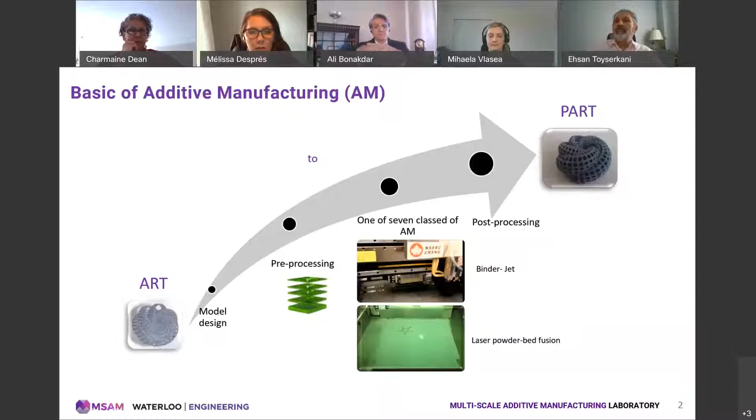As seen in this chart, the process enables the fabrication of complex parts so rapidly, thus enabling moving from art to physical part directly. For clarification, additive manufacturing is not one process. According to ASTM standards, AM includes 7 processes.

The most common one is material extrusion, known as FDM, very popular for printing plastic parts. The 3D printers used at homes and offices are mainly of this type. However, among more comprehensive and challenging processes, there are 3 used mainly for metal additive manufacturing: binder jetting, powder bed fusion, and directed energy deposition. Here at the University of Waterloo, we are mainly deploying these technologies for innovative R&D with industry.

As the modern history of AM is almost 35 years old, the versatile technologies and broad materials motivated people to adopt this technology for different applications. Back in 1995, the technology was mainly used for rapid prototyping, for design verification and visualization. It has also been used for rapid tooling and casting, in which prototype parts were used to develop molds and cast. In the first decade of the new century, AM technologies started to be used in the aerospace and automotive industry to make customized polymeric parts as jigs and fixtures.

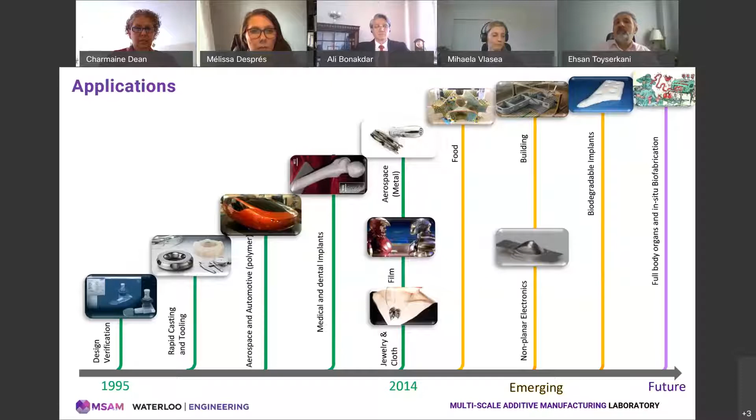In the second decade of the new century, the technology was commercialized for dental and orthopedic applications, a very growing market for additive manufacturing. It has been commercialized for the jewelry and clothing industry, the film industry, as well as aerospace for metallic parts. There are emerging applications in other industries like food, non-planar electronics, building, and biodegradable implants. In future, we will hear more about full organ printing and in situ biofabrication.

Public interest has dramatically increased. Look at this Google Trend chart. After 2013, public interest increased more than 40 times. That time was associated with news about printing guns and also the endorsement of President Obama.

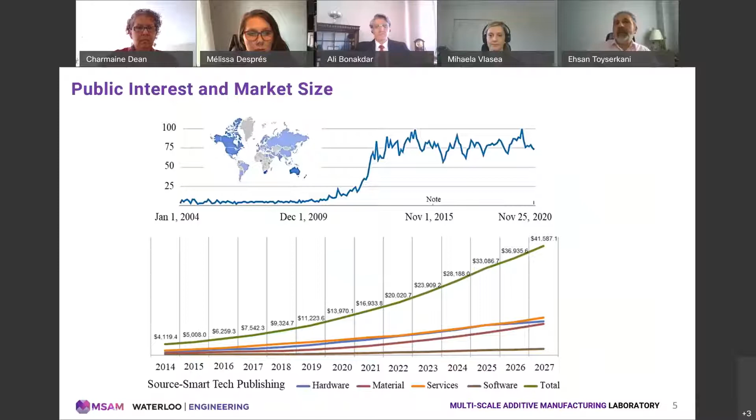Market size is also booming. The market size was $14 billion in 2020. This is the fastest growth among any manufacturing industries, with an annual growth rate of more than 20%.

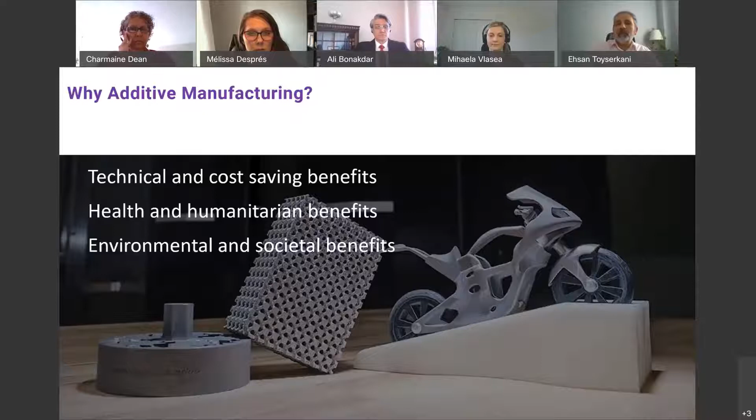But why additive manufacturing? There are many reasons for this high level of interest among industry, public, and academia. The reasons can be classified into three categories: technical and cost-saving benefits, health and humanitarian impact benefits, and environmental and societal benefits.

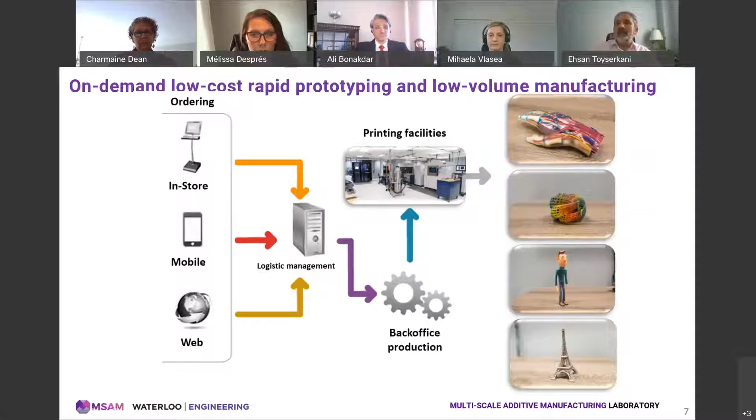One of the major applications of additive manufacturing is prototyping. Such prototyping usually carries at a fraction of the cost compared to conventional processes and at remarkable speeds. This rapid turnaround accelerates the product development cycle, including design, test, revision, and redesign. Products such as molds that could require more than 6 months with conventional methods can be ready for operation in 2 months if made by additive manufacturing. On-demand manufacturing can be realized so effectively and rapidly by additive manufacturing.

AM enables the fabrication of complex shapes that cannot be produced by any other conventional methods. The additive nature of AM offers an opportunity where geometrical complexities will not come at a higher price. Opposite to conventional methods, AM offers a platform called design for use rather than design for manufacture. Parts with organic geometry normally perform better. This feature of AM enables designing beyond imagination and provides tools for more creativity, flexibility, and efficiency.

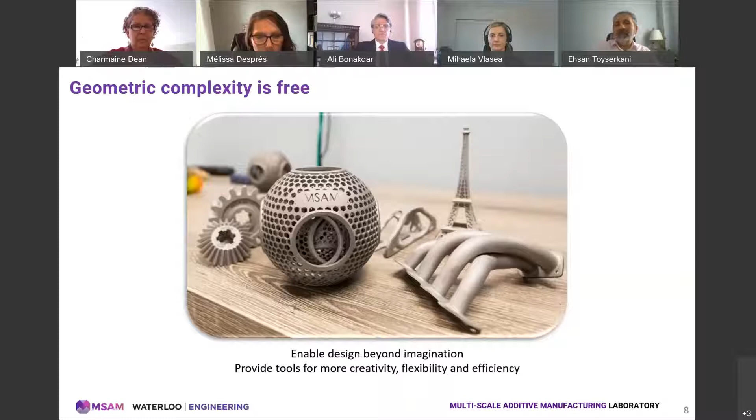Parts consolidation and lightweighting are major benefits of additive manufacturing. There is a major trend among manufacturers to fabricate greener and more economical products; serious obligations toward environmental sustainability have forced industry to develop lightweight components, where AM is a key player. In complex mechanical machines, there are tens, hundreds, or even thousands of components that are welded, bolted, or press-fit to each other. Parts consolidation offers many advantages due to the reduction in the number of individual parts needed to be designed, manufactured, and assembled to form the final system.

There are many advantages I could talk about for hours, but to name one: parts consolidation reduces overall risk of a system, as the number of risks associated with too many suppliers of individual parts drops. Take a look at this photo—it says 1,000 words. This is an A-CT7 engine midframe used in helicopters. 300 individual parts have been consolidated into one printed part, 7 assemblies converted to one, resulting in a 10-pound weight reduction.

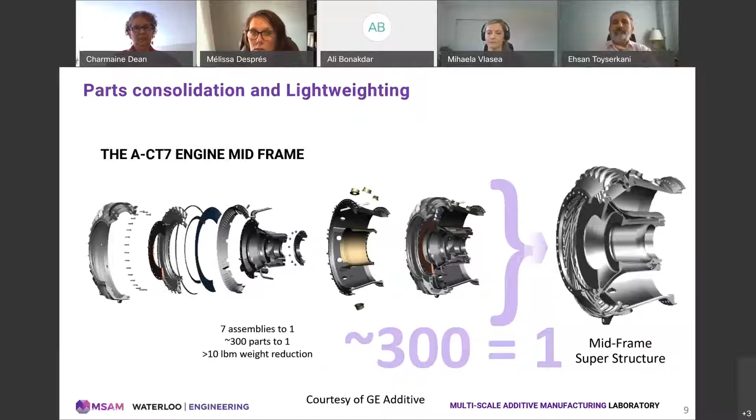For your information, AM parts can bring weight reduction in the range of about 50 to 100 kilograms per jet engine. This results in a significant reduction in fuel costs. Each pound reduction from every aircraft in a fleet of 400 commercial jetliners, like Air Canada, annually reduces fuel consumption by 30,000 liters. Just a few more examples that benefited substantially from lightweighting and part consolidation.

Given that SpaceX is a champion of vertical integration, meaning they bring in raw material at one end and a fully manufactured rocket comes out the other end of the factory, AM is the tool in the hand of SpaceX.

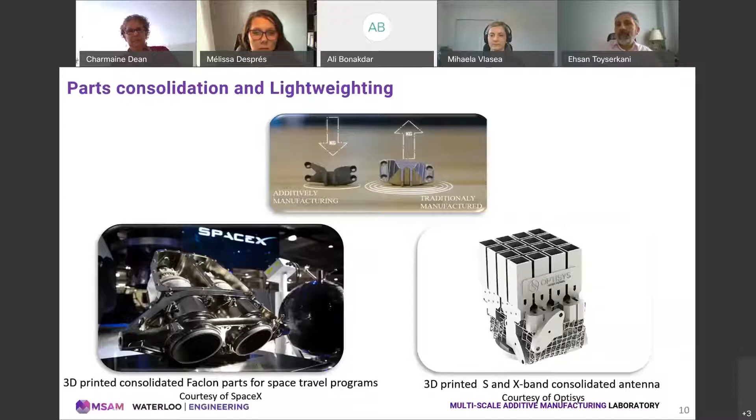The integration of multiple advanced materials and sensors into one component is one of the most rapidly developing areas of additive manufacturing. Cellular and lattice structures with embedded sensors are now becoming a main research thrust in many R&D centers.

Look at these two parts developed at the University of Waterloo. At the left, a smart tool with embedded fiber optic sensors that can measure force nearby the cutting edge. The other one is flexible sensors composed of graphene and silicone for wearable devices used in measuring forces. These innovative products cannot be made with any other techniques.

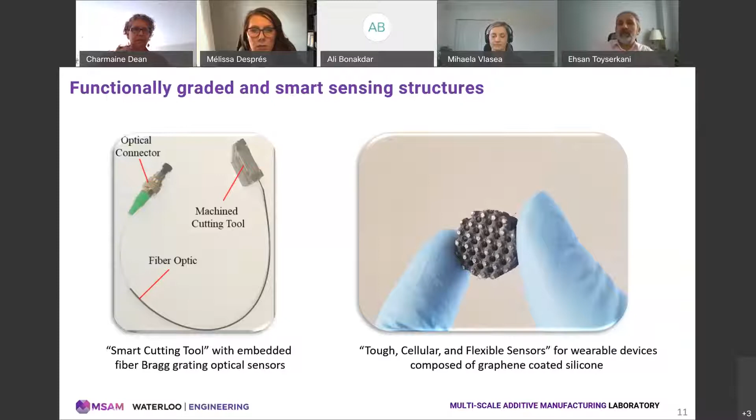Parts repair, refurbishment, and solid freeform fabrication are among other benefits of additive manufacturing. Machining errors or last-minute engineering changes can affect on-time delivery of tooling and impact the kickoff date of new products. AM can be applied as a safe technology to repair tooling, especially on critical contacting surfaces. AM, in many cases, can save high-value components that would otherwise need to be replaced.

As seen, AM has been used in situ repair and freeform fabrication of features on previously fabricated parts by other methods. It can also be used for making legacy parts where the supply chain is not available anymore.

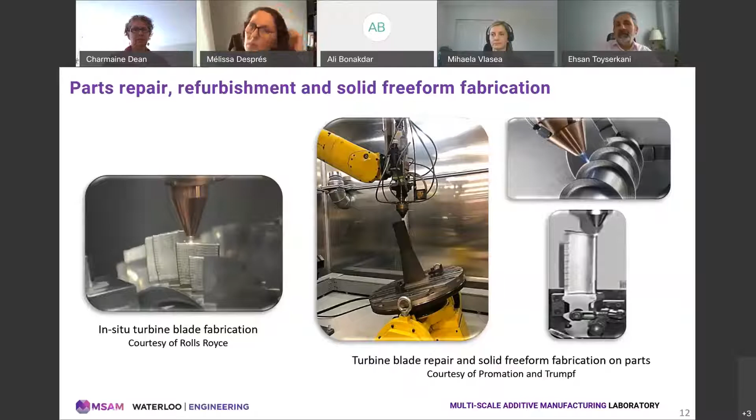AM offers a simpler supply chain. The recent pandemic has changed the mindset of governments, and they are now incentivizing local manufacturing to boost not only local communities, but also be ready for future crises. AM will play an important role in the realization of local manufacturing.

In addition, more innovators and user entrepreneurs are turning into on-demand manufacturers, utilizing the opportunities of access to flexible local production. A shift towards local manufacturing has already begun.

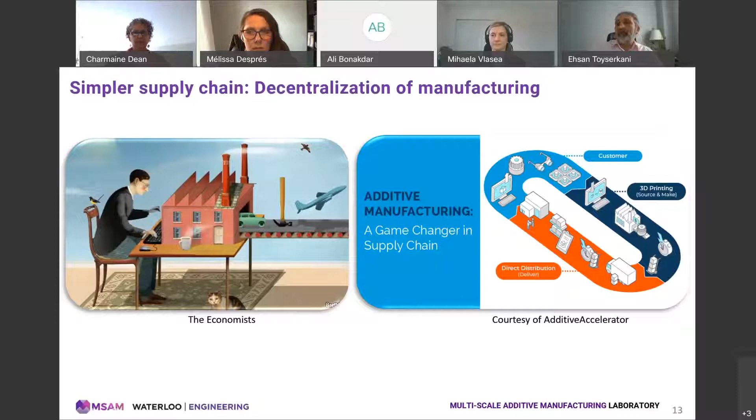Interruption to the global supply chain during crisis can be catastrophic to the health and well-being of society. AM processes can provide remedies during such crises. In March 2020, exactly last year this time, the 3D printing community got together to help in making medical devices during a very hectic period when medical centers were suffering from lack of PPE.

In the Waterloo region, the 3D printing community got together and coordinated by a local company called Inksmith. In a short period of time, more than 200,000 face shields were made and donated to hospitals until the global supply chain started to provide supplies again. I'm very proud that the team at MSAM contributed to this goal significantly.

Given the history and this story, the same distributed fabrication model can be used in any crisis, but it surely needs some proactive planning by the governments.

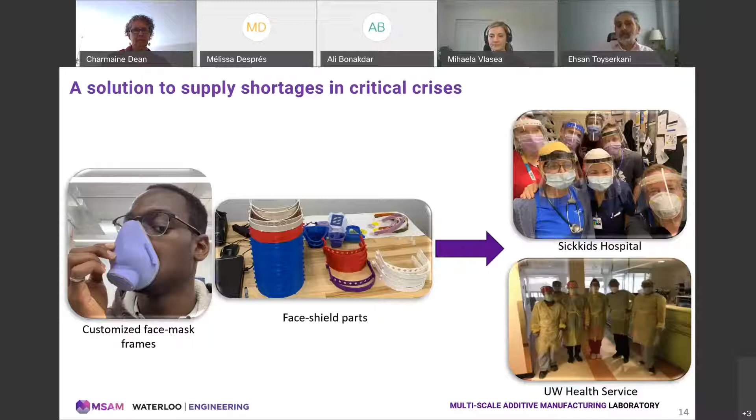The biomedical sector has been benefiting from additive manufacturing for almost 15 years. Customized prosthetic and implants are already being manufactured by AM. As seen in this slide, many innovative customized implants have been developed for different applications.

Alongside the obvious benefits to industry and medicine, AM is explored as a potential aid to humanitarian issues. Intensive R&D is already taking place in 3D printed houses to assist in the provision of homes and shelters in regions of need.

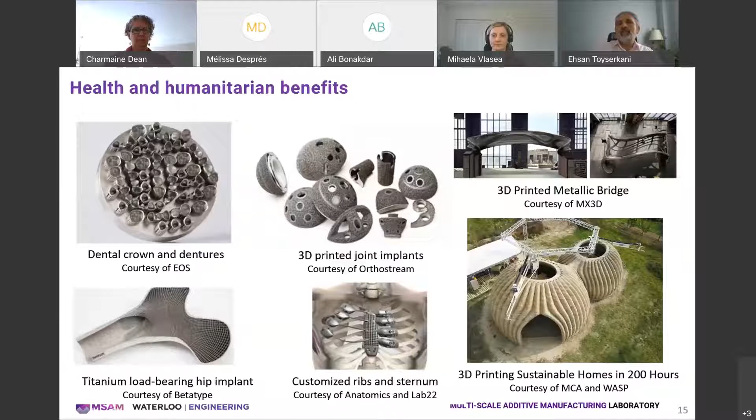In addition to undisputable process flexibility and benefits, AM also offers several major environmental benefits. If the process chain and designs are properly developed, AM technologies are usually greener than conventional methods because there is less material wasted and less steps required to fabricate the parts.

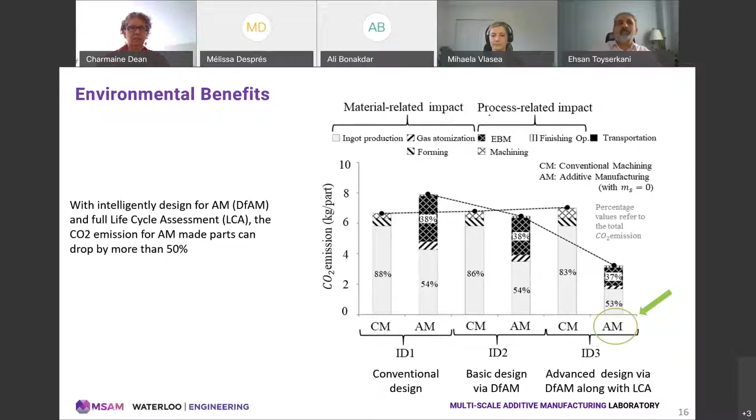However, a full life cycle assessment must be conducted on the AM part to ensure its design is fully optimized for additive manufacturing. The plot shown in this slide is very interesting. It shows that if we use AM for conventional design, the CO2 emissions even increases. But if we do a comprehensive design for AM, followed by life cycle assessment, the CO2 emission drops by more than 50%. This is one of the main motivation factors for industry to adopt AM for their business sustainability.

Like all innovative and emerging technologies, challenges exist for AM. However, these challenges have brought many opportunities for industry, academia, and public.

Shortage of qualified materials for AM has brought many opportunities to develop new alloys with superior performance. Speed and productivity issues have brought to the market many innovative AM systems with multiple lasers and automated powder delivery systems. Repeatability issues and in-situ quality assurance have motivated companies and universities to work massively on innovative integrated AM and artificial intelligence platforms.

Lack of industry-wide standards have mobilized many standard organizations like ASTM and ISO to work together and develop effective standards for additive manufacturing. Issues with end-to-end workflow, integration, and automation have encouraged companies to work on new software and AI algorithms. Interestingly, additive manufacturing has the highest adoption rate of artificial intelligence among industrial manufacturing platforms.

Software limitations have encouraged companies to add AM process constraints to modeling and simulation packages.

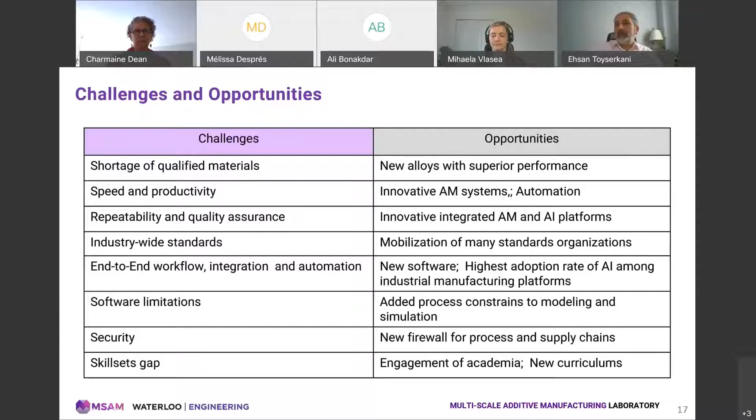Ladies and gentlemen, additive manufacturing is a long-term game changer. Thank you very much for your attention.

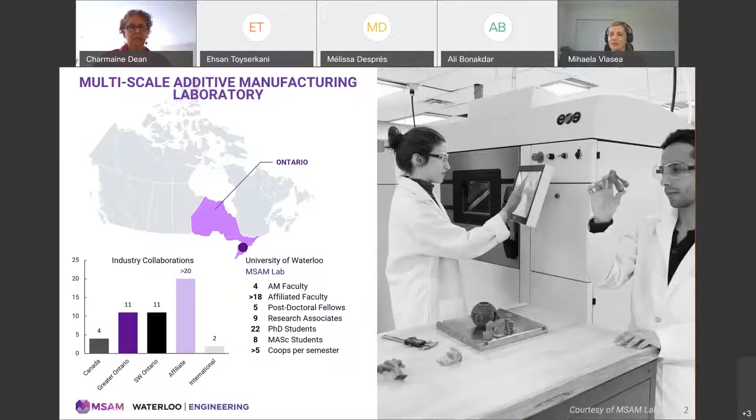We leverage the largest metal additive manufacturing academic research facilities in Canada, and we do so to engage not only in scientific discovery and industrial R&D spanning across multiple sectors, but also to engage in education and training.

In our day-to-day, we work on solving some interesting challenges in the field of additive manufacturing. The first challenge is to tackle the adoption of new materials for AM processes, specifically metals, which can enable new supply chains and market sector opportunities.

The second challenge is to work on the next generation of machines and custom manufacturing systems, either for research discovery or in partnership with industry. The third challenge is to leverage data science, modeling, and simulation towards improving the digital tools in additive manufacturing.

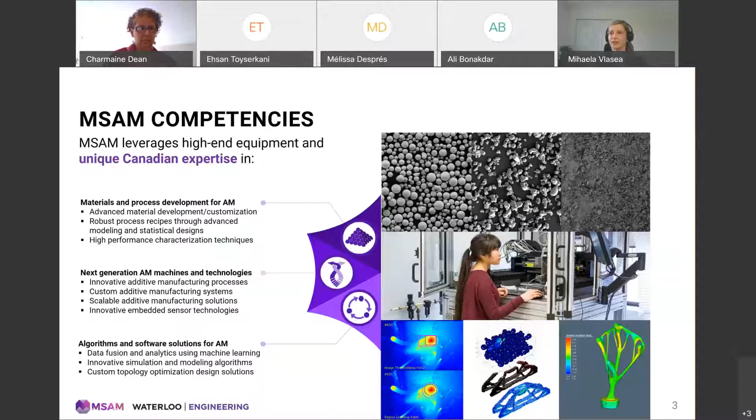To achieve these goals, our work spans the majority of metal additive manufacturing technologies, as shown on the right, with a secondary focus on ceramics and polymers as well.

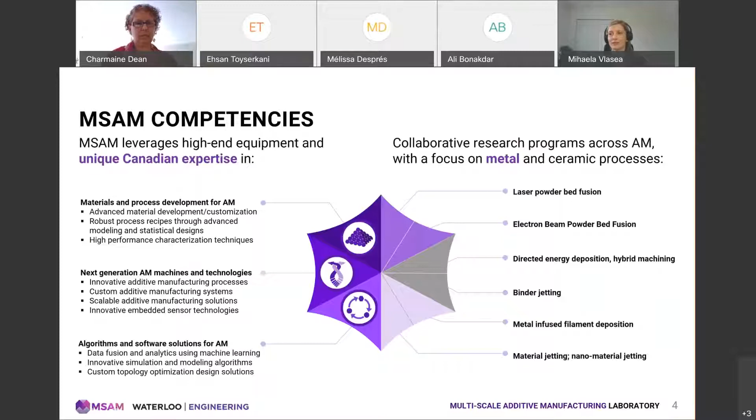Additive manufacturing, unlike subtractive and formative shaping, is the process of fusing units of materials together at select locations, usually layer upon layer, based on digital designs. Components manufactured using these three approaches can be combined into more complex shaped products by a variety of different joining processes.

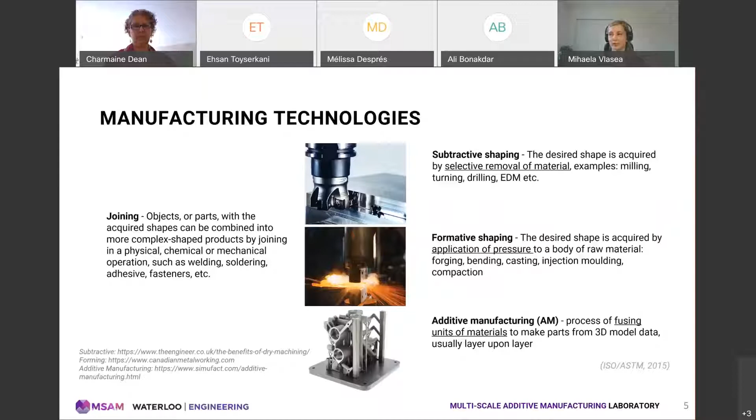This process of fusing units of materials together is what makes additive manufacturing unique. This means that you can generate architected materials at the micro, meso, and macro scale. At the micro scale, one may influence material properties by tuning each unit of material to a unique chemistry or material property. At the mesoscale, one may influence functional properties via cellular architecture designs, such as lattices.

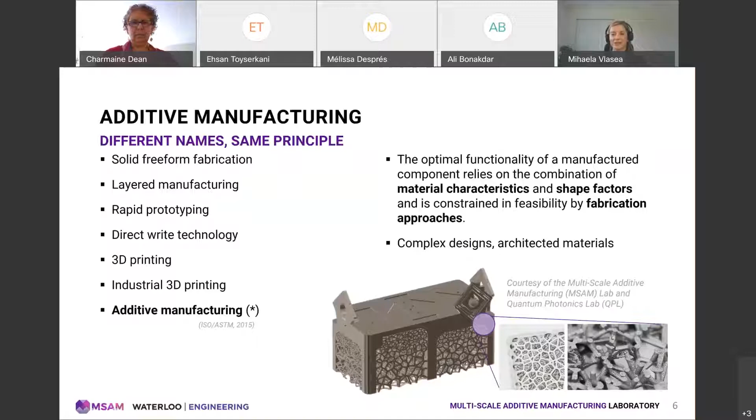And of course at the macro level, as Ehsan mentioned, we have new design freedoms which are not available via other conventional manufacturing technologies. Although known under many different names, I will be using additive manufacturing, or AM, throughout the presentation to describe this class of technologies.

AM processes, as Ehsan mentioned, have been around for quite some time. It was only recently that the consumer and industrial markets have seen accelerated technology adoption in this field. This is because most of the original patents on the 7 classes of additive manufacturing technologies, 7 core classes, have expired in the last decade.

These technologies have evolved since then to accommodate for multiple materials to be adopted under the same technology class. New technology classes have also emerged. Today, I will only focus on laser powder bed fusion.

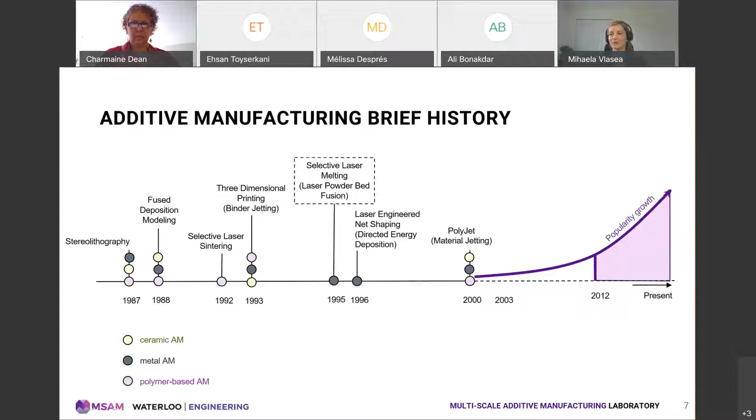In the metals domain in particular, we see a boom in technology uptake and industrialization. This is mainly driven by an increased number of alternate technologies that can address metal production, proven competitive advantage of design freedoms in innovative products, as well as an increased comfort level with AM technology based on proven part life cycles across multiple sectors.

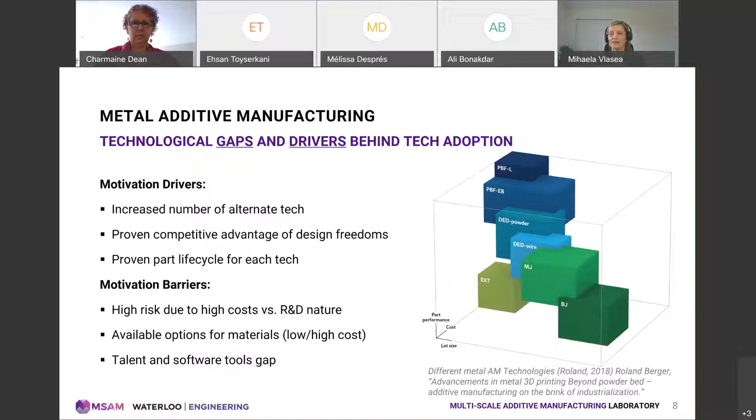Barriers still remain. There is a perceived risk due to high initial capital costs and the R&D nature of these technologies. There is still a need to increase material libraries for these processes as well. In addition, there is a recognized talent gap and software tools gap to effectively deploy AM.

Now let's take a look at how we address these gaps at the MSAM lab.

Although we focus on multiple metal additive manufacturing technologies, I have selected only one process to cover today, called laser powder bed fusion. In this process, thin layers of powder with a layer thickness smaller than a human hair are spread and selectively molten at specific locations within each layer using a very fine laser beam spot. The sequence is continued until the parts are completed. This is a thermal process which requires support structures not only to anchor the part to the build plate, but also to ensure heat transfer, reduce part curling, and reduce porosity defects.

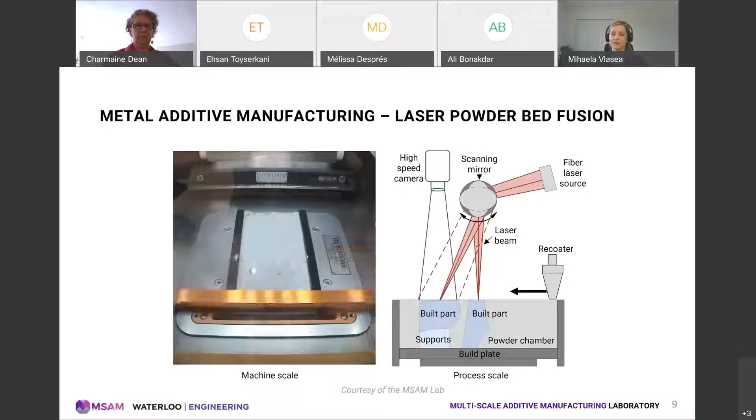For laser powder bed fusion, the laser material interaction is in essence a micro-welding process, where the material undergoes melting, vaporization, and often ejection. With each added layer, the material is exposed to melting, solidification, and thermal cycling, influencing the microstructure and material properties of the final component.

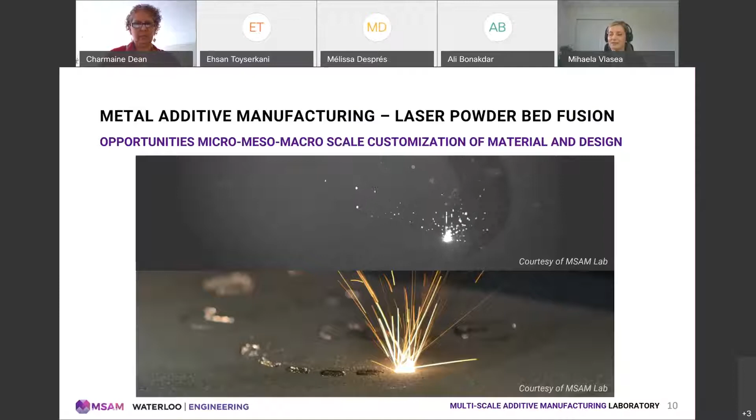The process, believe it or not, has more than 100 parameters that can be tuned in manufacturing. In addition, these parameters are sensitive to the design geometries being printed and can result in part failure if not selected properly. This is why at MSAM we are working on research that de-risks material adoption and increases process robustness.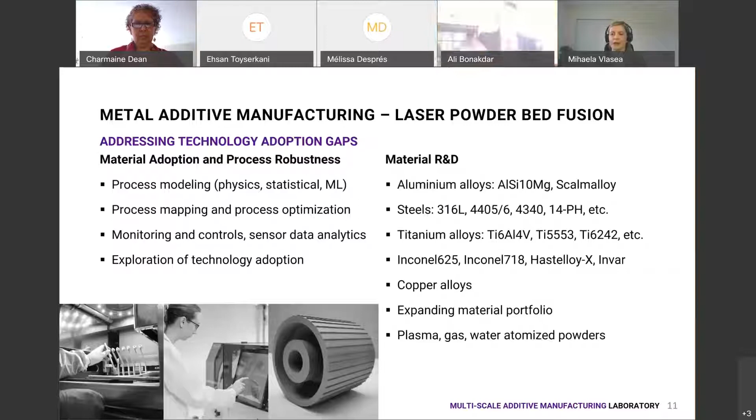These goals are achieved by research efforts in process modeling and simulation to predict the behavior of the laser material interaction and to narrow in onto optimized process parameters that result in successful products, even when printing challenging geometries. In addition, we work on sensor data analytics to monitor the process and to eventually react to perturbations via control schemes. In addition, our lab is exploring new material systems in laser powder bed fusion and other technologies in collaboration with industry partners to address technology adoption in numerous sectors.

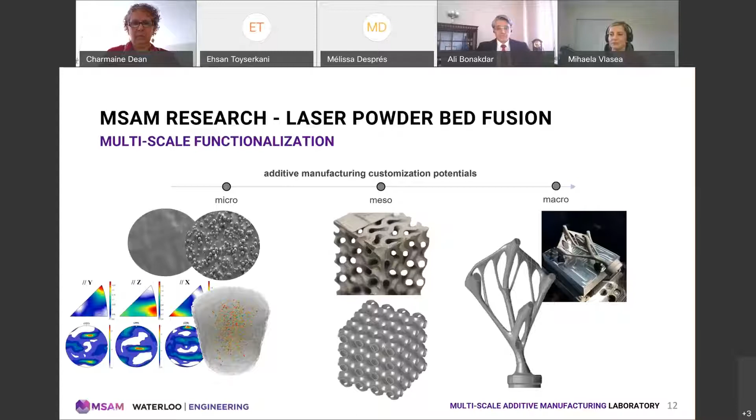To accomplish customization at these three different scales, at the MSAM lab, we look at the process chain holistically from powder to product, to find process parameters that result in repeatable components. And we achieve this by looking at low-cost powders or new powder material systems, and we try to understand their properties.

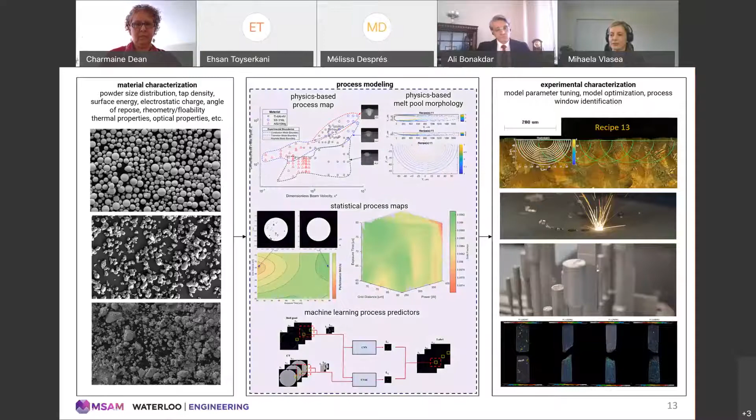Following this step, we strive to refine and deploy complex process modeling, statistical designs of experiment, or data science approaches such as machine learning to optimize process parameters at low cost. Once process parameters are optimized, samples are manufactured and characterized to quantify their quality. Let's take a look at a few examples of modeling to achieve parameter optimization.

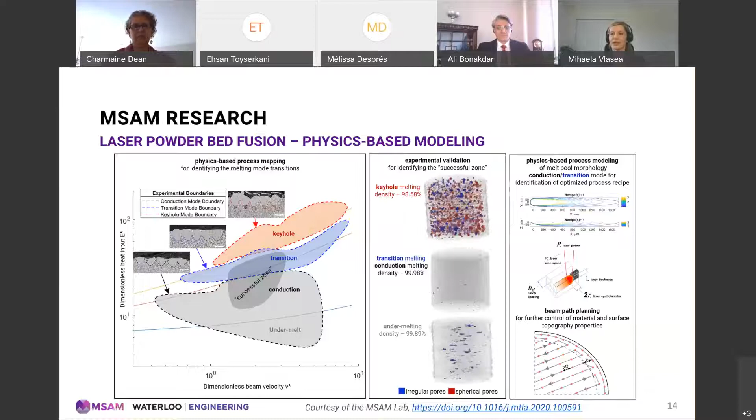Furthermore, we can model these melt pool morphologies to be able to stitch weld lines together to create low defect parts. For some instances, statistical models can be deployed for creating process maps and for optimization of process parameters. These approaches are quite powerful, but do rely on a larger set of experimental points to inform a model.

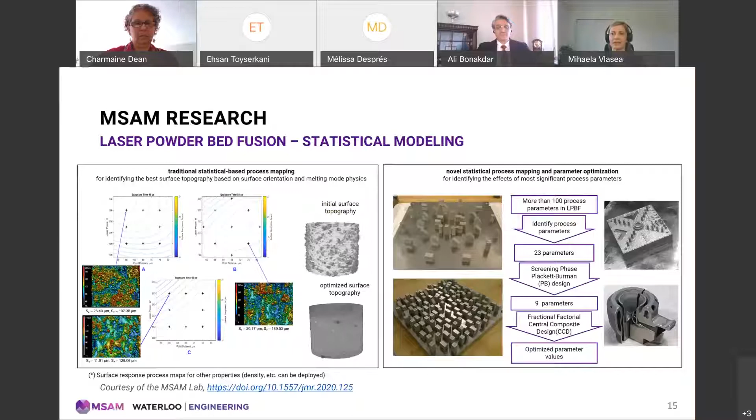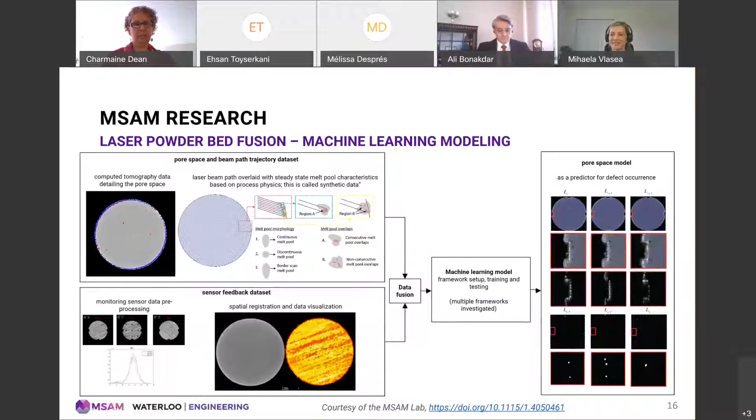Similarly, machine learning models are a new area that is being explored. Using this approach, multiple data sets are used to train and test models as well. Such data sets can be informed by process inputs, sensor data, product qualities, or physics-based models. This is really an exciting field with significant work ahead.

Now, in the last couple of minutes, I'd like to take a look at how we deploy laser powder bed fusion to solve real-life problems via two examples.

In this case study, Intellijoint Surgical came to us with an interesting problem. The group uses a surgical tracker and a camera system to assist in the alignment of an acetabular cup in hip replacement surgeries. Specifically, the surgical tracker, as shown here on the right, was a challenging piece to manufacture using conventional manufacturing techniques, requiring a complete rethinking of the design space.

In developing a solution, researchers at the MSAM lab first selected and characterized a titanium alloy suitable for this biomedical application. Then we proceeded with multi-scale simulations to be able to tune process parameters for manufacturability of challenging designs. Furthermore, we lightweighted the design via topology optimization with care to manufacturability, ergonomics, and part functionality. We then simulated the manufacturing process and produced the final parts.

One of the most important lessons really has been that innovative thinking in additive manufacturing as well as machining have to go hand in hand to produce a technically sound and economically feasible product.

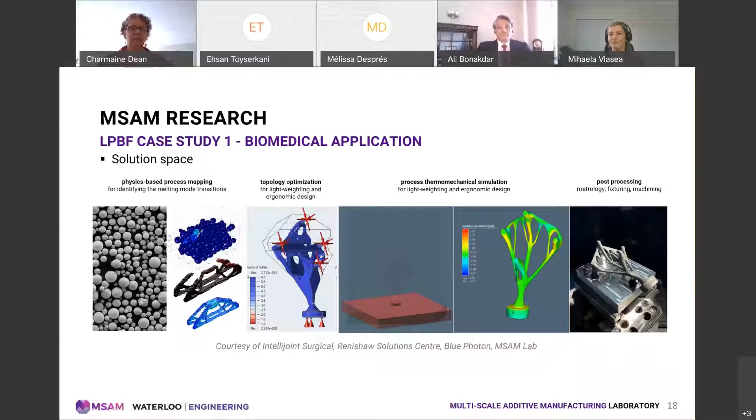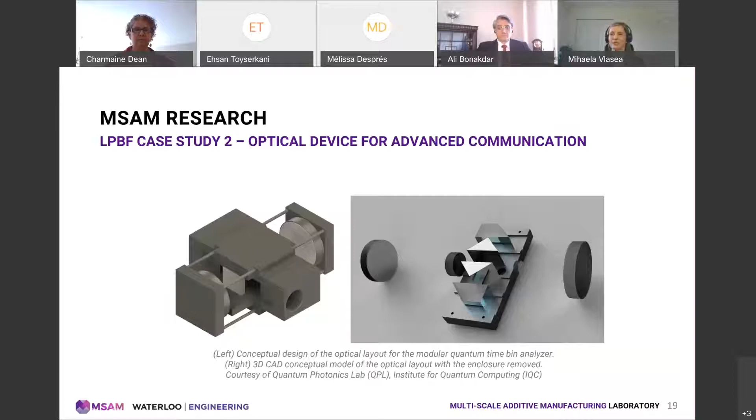In my last example, the researchers at the MSAM lab and the QPL lab here at the University of Waterloo looked into the feasibility of deploying laser powder bed fusion for the fabrication of optical device components, such as interferometer housing and adjustable mirror holders. This assembly is envisioned to be suitable for novel advanced communication systems.

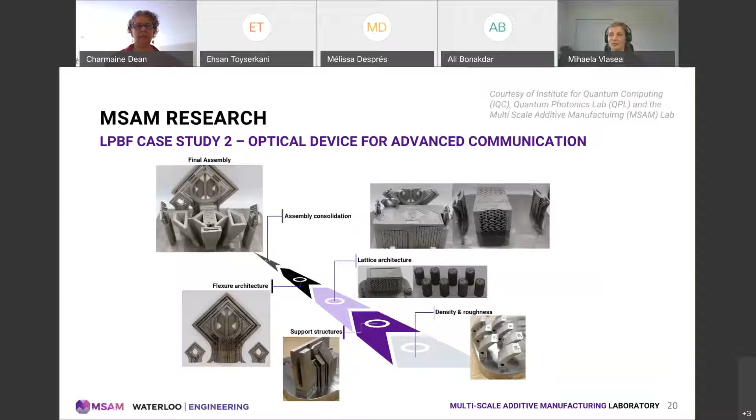The team worked on adopting a new nickel-based alloy with a high thermal stability. In addition, we explored the design space towards producing this innovative interferometer. The complex design space required our team to deploy modeling and simulation, as well as statistical designs of experiment to optimize our process parameters.

One of the most important lessons that we learned has been that it is often challenging to really fully utilize one's imagination to be able to leverage the true design potentials in laser powder bed fusion. For instance, on the left, we started with a design concept that was rooted in conventional manufacturing. This continuously failed in the laser powder bed fusion manufacturing step. As soon as we started to think out of the box, this is when we finally were able to manufacture the entire optical assembly successfully.

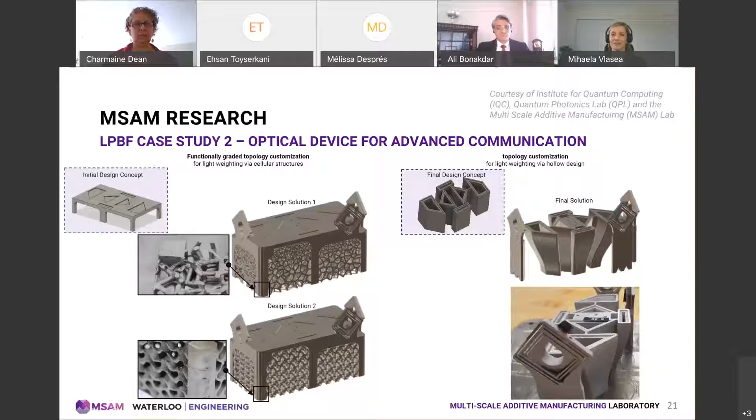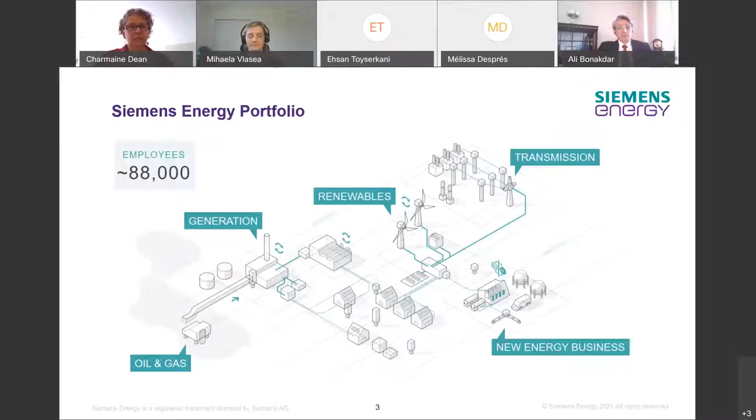So in the gas turbine industry, we have an extensive portfolio and our engines can generate power from 4 megawatts up to almost 600 megawatts. We have 3 classes of gas turbines: aeroderivative gas turbines, industrial gas turbines, and heavy-duty gas turbines. Aeroderivative and industrial gas turbines are mostly used for offshore and onshore applications for oil and gas industries. Heavy duty for power generation, electricity. I belong to the aeroderivative gas turbine industry.

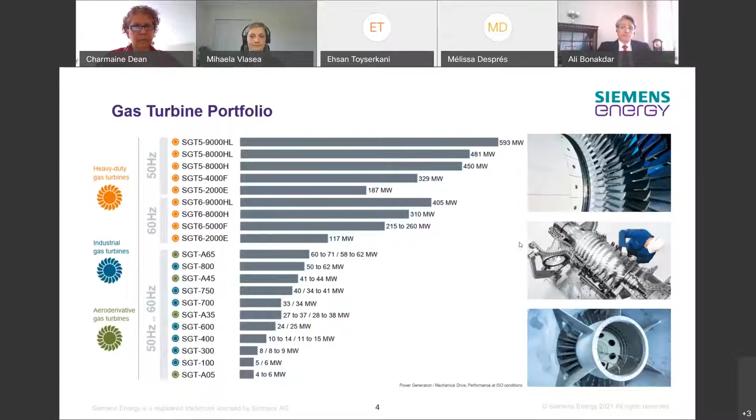We have a center in Montreal, more than 400 people working here, and more than 200 people are fully involved in research and development. I presume you can imagine how extensive our research and development activities could be. Particularly for advanced manufacturing, we have focused on additive manufacturing, low emission combustors, advanced machining, advanced compressors and turbine designs, manufacturing simulation, general digitalization, higher temperature materials and coating, HVOF, plasma spray, laser electron beam technologies, mostly for welding and joining.

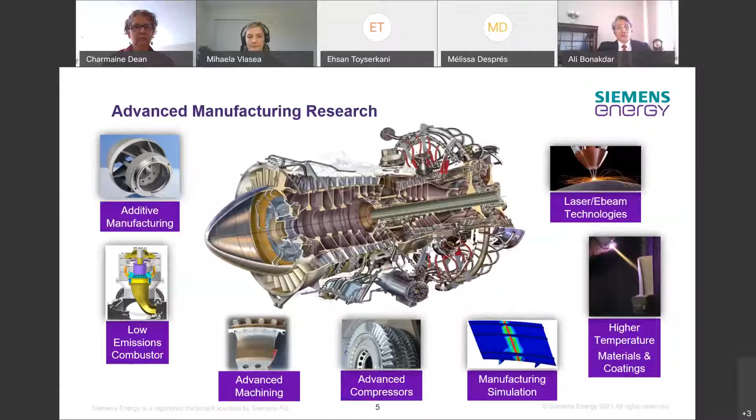Particularly for additive manufacturing, which is the topic of the conversation today, we believe that this is a game-changer technology, and there are lots of benefits associated with this technology, including time to market lead time reduction through fast technology validation and shortened process development, supply chain and reduced complexity, mitigating the single source, and also reduction of the assemblies to one component.

For instance, we have different components consisting of different manufacturing processes, and we can consolidate all in just one process, which is additive manufacturing, that can lead to cost saving, cost reduction, which is one of the main motivations for industries acquiring and developing this technology.

Environmental benefits by reducing the emissions through complex designs, through enhancement of the design, and also innovative designs by new geometries, more complex design, and using different physical phenomena for the design, like for instance, negative Poisson ratio, negative stiffness for lattice structures.

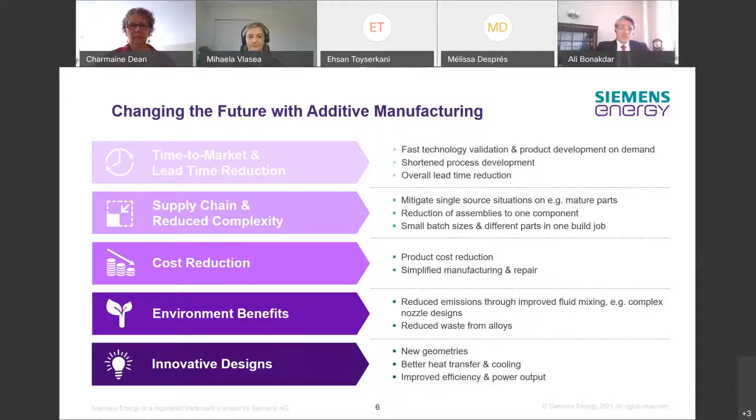In terms of the capability available, the machines and hardware, we have 2 centers for repair and serial production. One in Finspång, Sweden, we have about 15 additive manufacturing machines installed there, with a focus on repair and serial production. This center in Sweden is mostly used for parts and components from Siemens Energy. And the other one, which is based in UK, Materials Solutions, is a service provider not only to the Siemens components, but also for other industries as well.

19 additive manufacturing machines are there, and the plan is to increase to 50 machines. Both of them are new state-of-the-art additive manufacturing facilities, and there are lots of capabilities, and the plan is to expand them in the next couple of years.

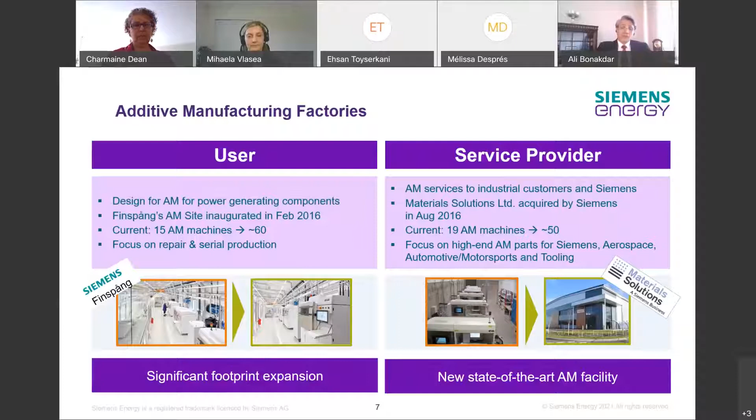In terms of the components that we have developed, designed and printed, we have more than 150,000 hours engine experience for Siemens parts, for gas turbine, mostly for gas turbine engines. On the right side, there are just a couple of new examples of the components: burner head for serial production, for spare parts, and all. The last one is the turbine blade, stage 1, for the Siemens gas turbine, which is the SGT 400 engine.

75% technology validation, which is very difficult to validate for the rotating parts, but we've achieved the milestone so far.

In addition to the Siemens components, we have printed several components for the aerospace industry and automotive. For aerospace, nickel-based superalloys, different lightweight materials, structural parts, and advanced combustion designs for them as well. We are printing parts, and also at the same time we have the capability for designing the parts, so we have full capability from design to manufacturing and post-processing. And for the automotive, titanium materials and higher strength materials as well.

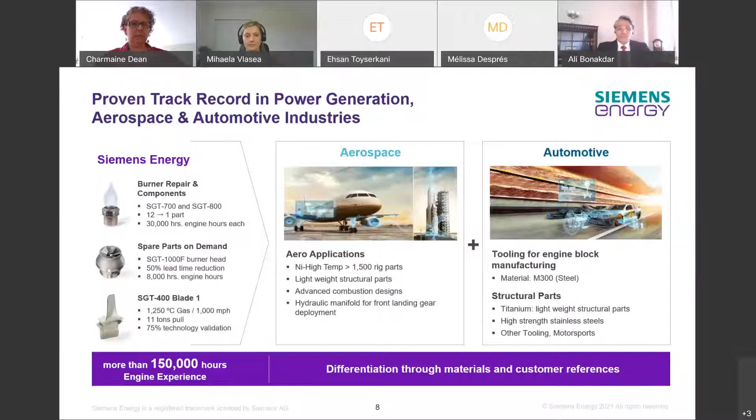For the capabilities in terms of material, we have qualified different materials ranging from nickel-based superalloys to cobalt, non-weldable, weldable, and also qualified materials for external applications, which means for customers in the automotive industry or aerospace industry.

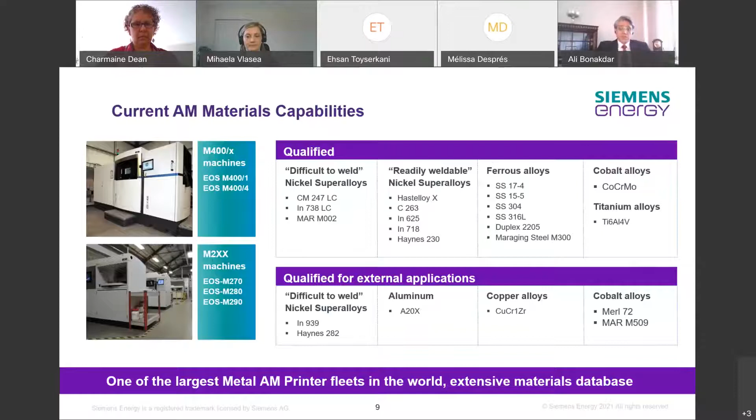All in all, I can say that Siemens has one of the largest additive manufacturing fleets in the world, and we are leading this technology, we're developing this technology. In addition to all these things, we have invested significantly in research for technology development from TRL 1 to 4 for basic or fundamental research, 4 to 6 for prototyping and validation of technology, and 6 to 9 for pre-production and production.

Specifically for the research, we have been focusing on different areas, including materials and process. For process development of the technology, it's not only for selective laser melting or powder bed fusion, it can be binder jet or FDM or other applications and technologies as well.

Material development, multi-materials, new materials, digitalization and automation, digital twin of the product, digital twin of the production and process as well. Data acquisition and handling to enable machine learning, which is a subset of artificial intelligence.

Design for additive, extensive research internally and externally for design for additive, multi-physics topology optimization, lattice structures, the physical concepts like negative Poisson ratio, negative stiffness for the enhancement of the performance of our components.

For machining and manufacturing, hybrid additive manufacturing process, post-processing, lots of research are ongoing on the post-processing of the additively manufactured part.

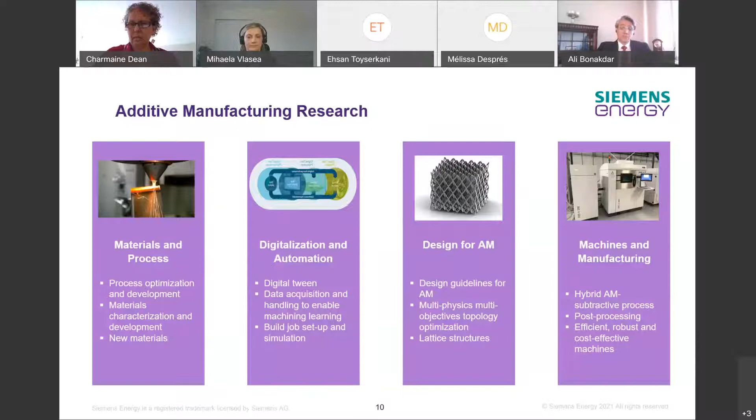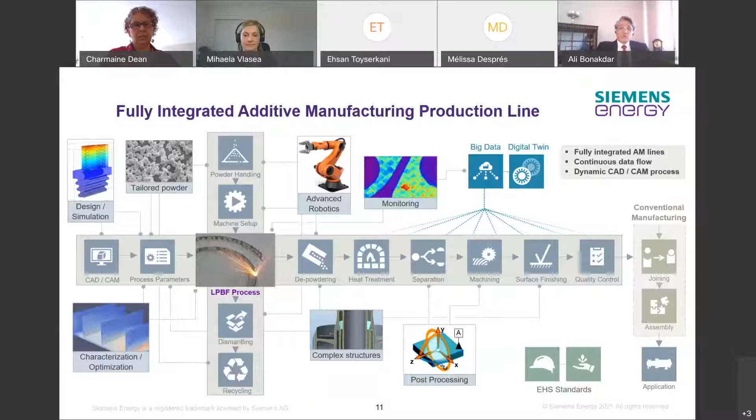Specifically in Canada, we signed an agreement with the University of Waterloo in 2017 for conducting research in 5 different areas: process optimization, process thermomechanical simulation, topology optimization, material simulation, and process monitoring. After 4 years, I would say that it went very well. We met all the objectives, resulting in very good outcomes. It resulted in several patents, very high quality journal papers, and we are planning to commercialize a few of them.

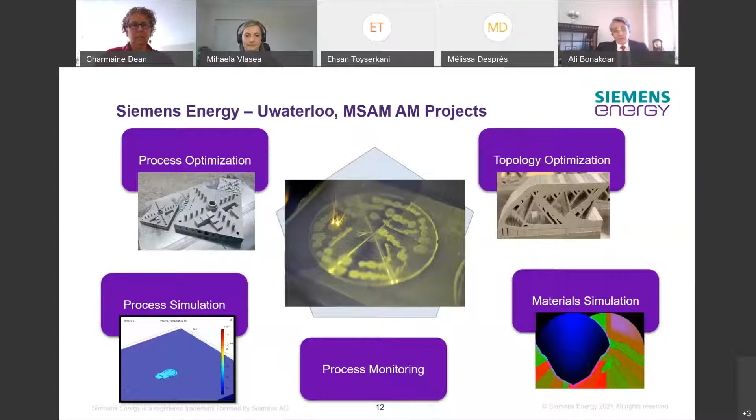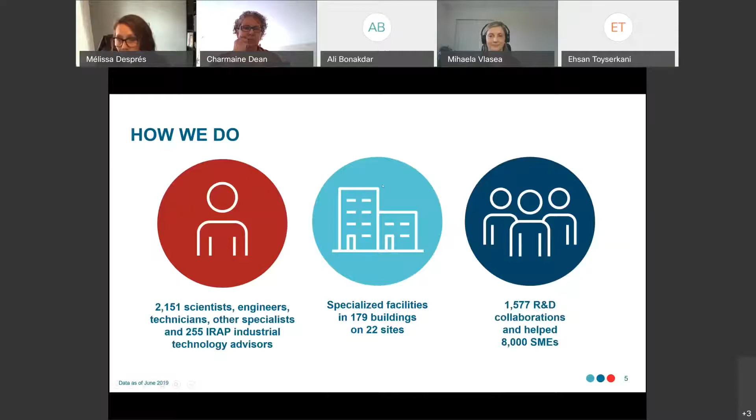In a few numbers, we have more than 2,000 scientists, engineers, technicians, and other specialists, and 255 IRAP industrial technology advisors. We have specialized facilities in 179 buildings and on 22 sites. We drive about 1,500 R&D collaborations a year and help more than 8,000 SMEs. In 1 year, what does that mean? It means 1,000 publications, 200 patents, and $193 million of NRC revenue.

Now that you know a little bit more about NRC, I'm going to show you how we create links, how we interact with the different players in the Canadian industry.

In order to have fruitful and value-generating collaboration, it's important to be able to bring together the main actors of a sometimes complex ecosystem. Several players must work in synergy.

In this model, it's neither more technology push nor technology pull, there is only a consultation of the actors, multiplying the innovation step change and speeding up the development loop.

But for this to happen, the actors must feel confident, putting aside the hierarchical notion of their own position in the industry food chain. All actors in this ecosystem are equal, no big nor small company, no global versus local company.

It is in this context that we believe that the NRC is an essential player in a multitude of ecosystems. Why? The NRC is recognized as a neutral, unbiased connector and convener.

Being public servant is at the heart of our employee. With over 100 years of operation, we have a vast network to draw upon. We connect Canadian innovators to leading R&D capabilities.

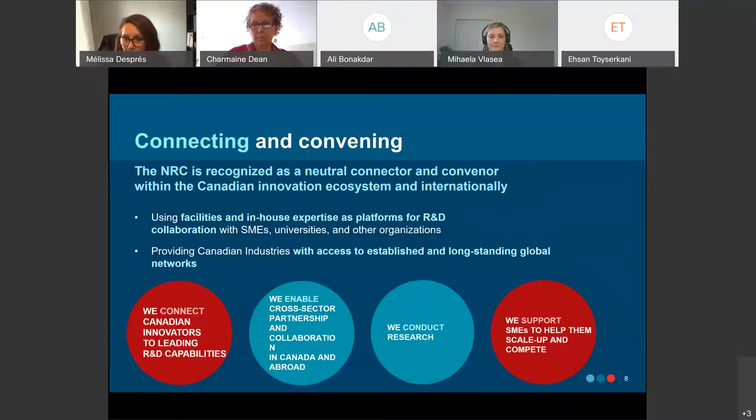We enable cross-sector partnership and collaboration in Canada and abroad. We conduct research and we support our SMEs to help them scale up and compete.

In the following slides of my presentation, I will show you how we concretely go about becoming a key player in a relevant ecosystem. I will present you the example of an industrial R&D group that we created

more than 10 years ago. The group is called Metaltech, and it's known to be the largest ecosystem led by NRC.

Metaltech is a group of companies, not-for-profit organizations, and industrial associations that work together to bridge the gap between early-stage R&D and technology market readiness to decrease investment

risk, to solve industry-wide technology problems, to increase cost-effectiveness of emerging products, to create complex multidisciplinary technological solutions that address emerging industry needs, and to act as a pre-competitive research cluster driving collaboration for the transportation equipment manufacturing ecosystem.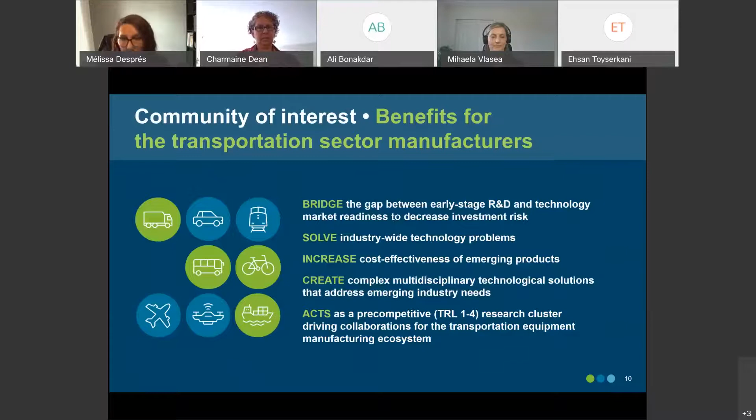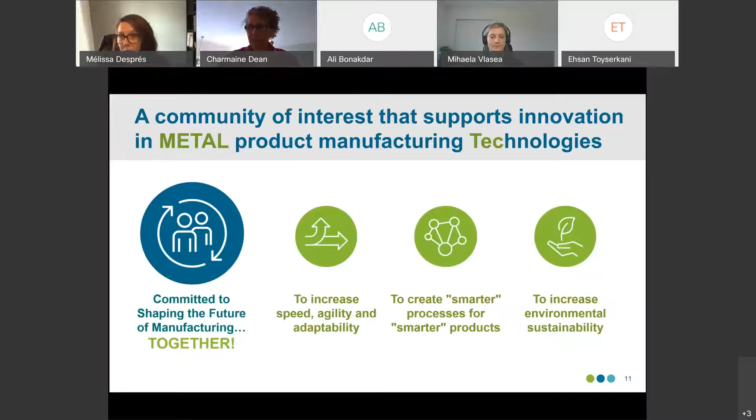More precisely, METALTec is a community of interest that supports technological innovation in the manufacturing of metal products to increase speed, agility, and adaptability of their production, to create smarter processes for smarter products, and this in respect of our dear planet Earth.

Our member companies and partners cover the entire value chain and work together on the biggest issues in the sector. The main benefit of joining METALTec is to share the benefits, risk, and costs associated with pre-competitive research.

With a minimum contribution, we talk here about 16,000 a year, an individual company with the force of the group can raise up to 3.5 million in research and development activities.

METALTec currently has 27 companies and hopes to reach a critical mass of 50 companies in the coming months. So it goes without saying that we are looking for new companies interested in joining the group and benefiting from

our research results. Of course, the group counts on the support of more than 10 sponsors and more than 10 academic collaborators, colleges and universities included.

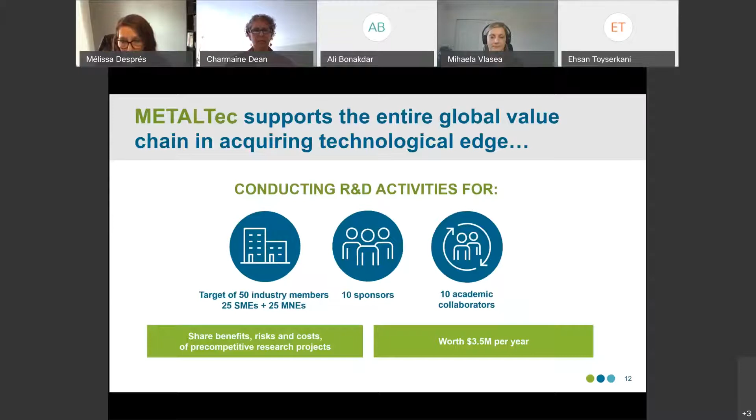We're about to concretize a new collaboration. And of course, Government of Canada and Government of Quebec work hand in hand to support this group.

So at a glance, a company can afford a 4 years contribution, $63,000, and raise about 3.5 million worth of R&D project a year.

There is call for project proposals twice a year, 2 annual member meetings where we conduct R&D steering committee, software user meeting, conference, and emerging technology teaser.

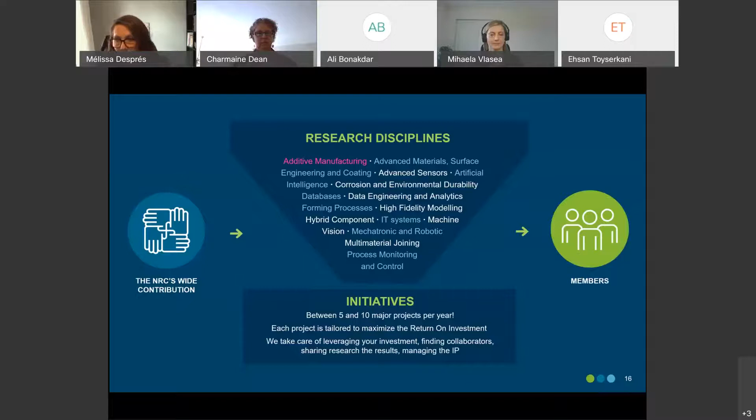Why am I talking about Metaltech today in a research talk entitled Enabling Disruption, the Next Generation of Additive Manufacturing? Let me explain without further delay. The research areas of Metaltech are the following.

Advanced sensing systems, data engineering and analytics applied to manufacturing process, high fidelity modeling, simulation and optimization of manufacturing process, intelligent tooling, corrosion and durability in multi-material contexts, surface engineering for advanced manufacturing, manufacturing for structural lightweighting applications, advanced mechatronic platforms for incremental manufacturing, and additive manufacturing for mass customization.

So you may be wondering about NRC's capabilities in additive manufacturing. Well, this image illustrates just how extensive they are. We have DED laser blown powder, high fidelity simulation, hybrid laser powder bed.

We have robotized additive friction stir welding, mesh-free modeling of additive friction stir welding, wire additive manufacturing, cold spray additive manufacturing, and high fidelity simulation of the various AM processes.

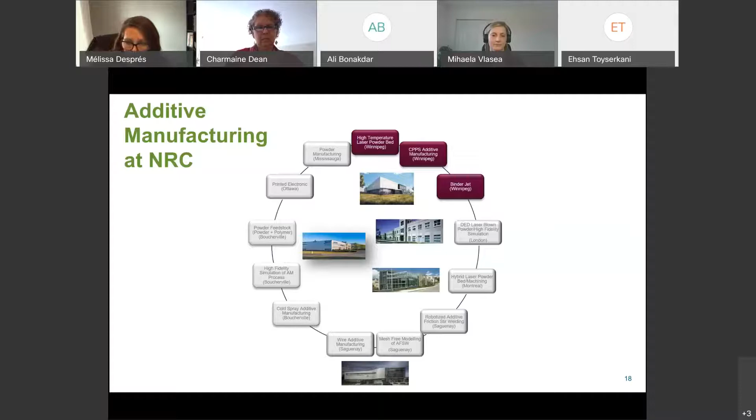And what does NRC do with all this great expertise and amazing equipment? Projects, of course. So in the following slides, let me show you a few projects conducted in 2021 in Metaltech.

I told you earlier that NRC and Waterloo University are about to start a new collaboration on additively manufactured die casting tool life. Here it is. The objective of this project is to compare the life to failure of laboratory scale additively manufactured, conformally cooled specimens in a representative environment.

Identify design and laser powder bed fusion parameters to increase the life of additively manufactured inserts and therefore reduce process and maintenance costs. The expected benefit and impact for the industry member are to provide design and laser powder bed fusion process parameters favoring longer die casting insert life, therefore reducing process costs per part and increasing competitiveness.

The compromise between deposition rate and material property, as well as between cooling capacity and expected life, will be highlighted. Thermal testing will also provide a comparison of the expected service life for different process parameters, design, and/or material, compared to conventional H13 steel as a reference.

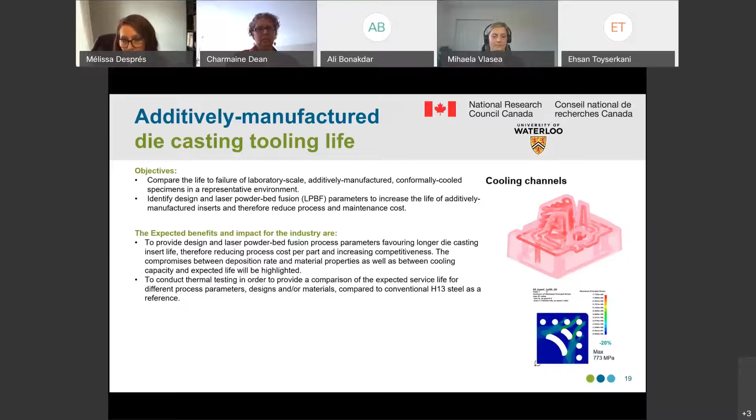The second project is entitled Manufacturing Process Simulation of Laser Powder Bed Additive Manufacturing. The objective of this project is to develop a state-of-the-art computational simulation platform and multi-scale laser powder bed fusion model, and develop a numerical model to optimize support structures based on process simulation.

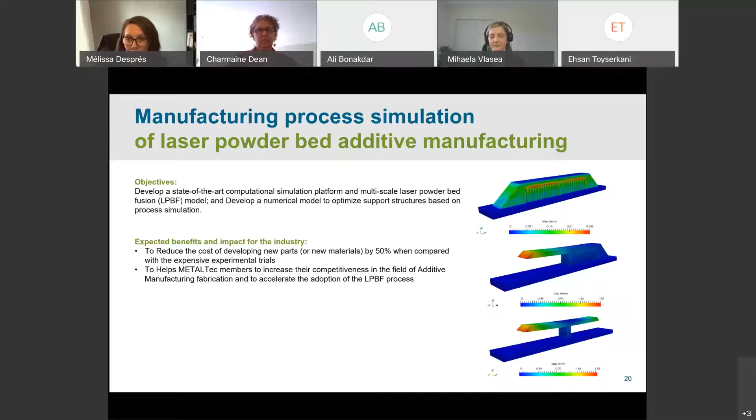The expected benefit and impact for industry is to reduce the cost of developing new parts by 50% when compared with expensive experimental trials, and help METALTec members increase their competitiveness in the field of additive manufacturing fabrication and accelerate the adoption of the LPBF process.

The third project is the optimization of thermal management of tools used for aluminum forming with additive manufacturing. The objective of this project is to develop a software platform or workflow based on topology optimization in company with a new composite powder for LPBF to optimize thermal management of tools in the aluminum forming industry.

Expected benefit and impact for the industry is to deliver an efficient and uniform heat transfer in mold and part, reduction in cycle time, and lower mold and part stress, which result in better mechanical properties, less warpage, reduced rejects, and less risk of recall.

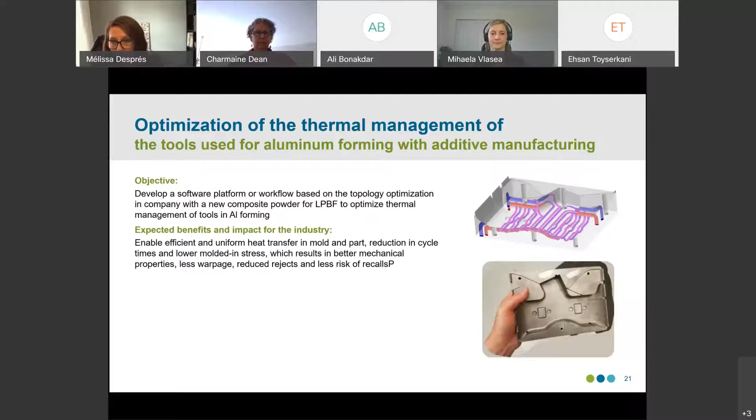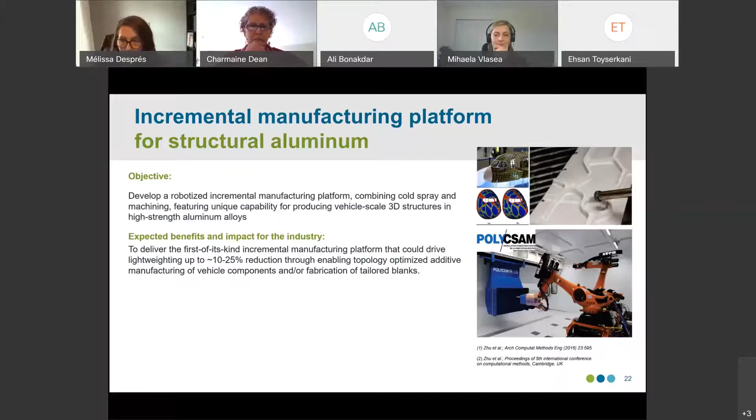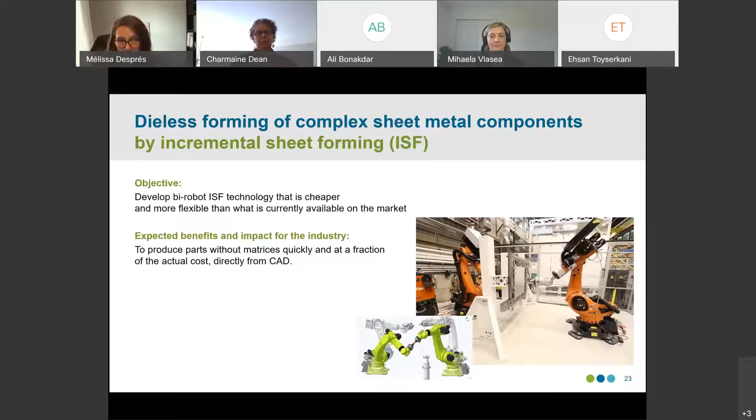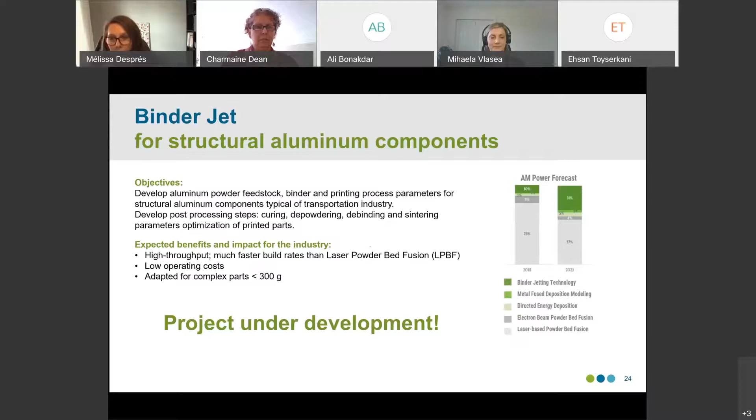So thanks to a big team, it was my pleasure to be with you today. Thank you very much, and I hope you have an excellent day.